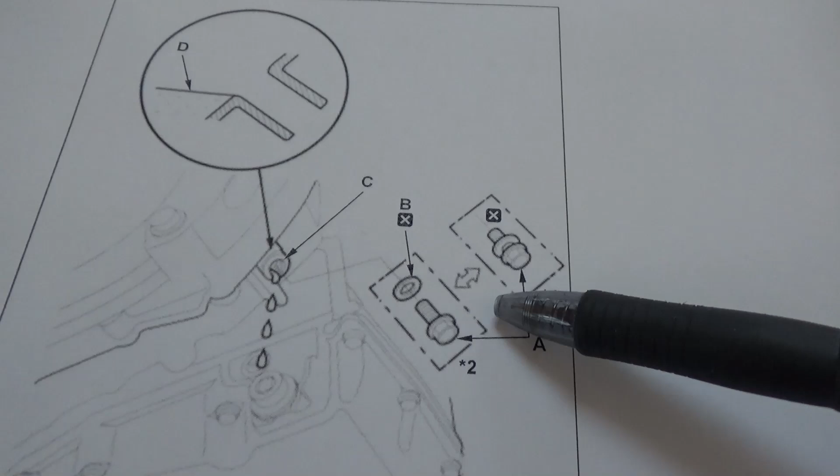The CVT fluid level is checked via a check bolt, so you want to make sure that the vehicle is level when you check it. So you will want it up on 4 jack stands or on a lift or something that keeps the body level so it doesn't affect the accuracy of the transmission fluid check.

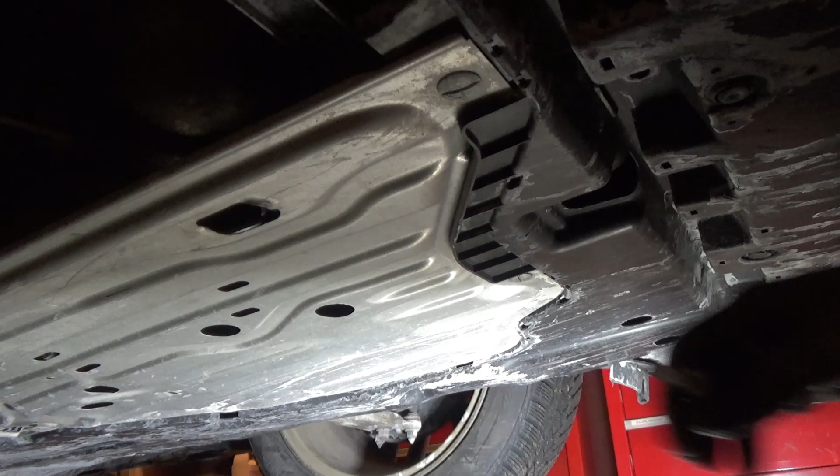And then you do have to take this panel off. There's just some single turn fasteners that have a straight slot in them in the front of it. And then I think there's one a little bit further back here. Yep, right about here.

Okay, and then in the back there's 2 Phillips head screws that have to come out. Definitely helps with these if you coat them with a little bit of oil or WD-40 or something before you put them back in, so you can get them back out again. Otherwise the threads on the top are exposed, so they get pretty stuck in there. And then once you've got all the fasteners out, the whole little metal panel just slides back and comes out.

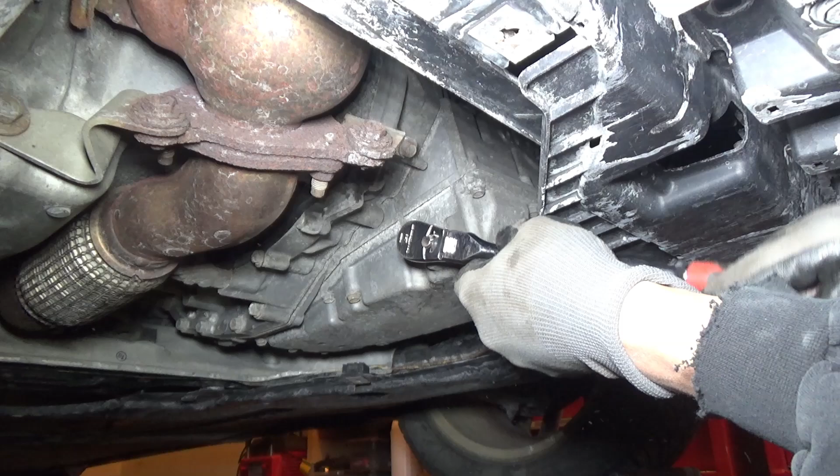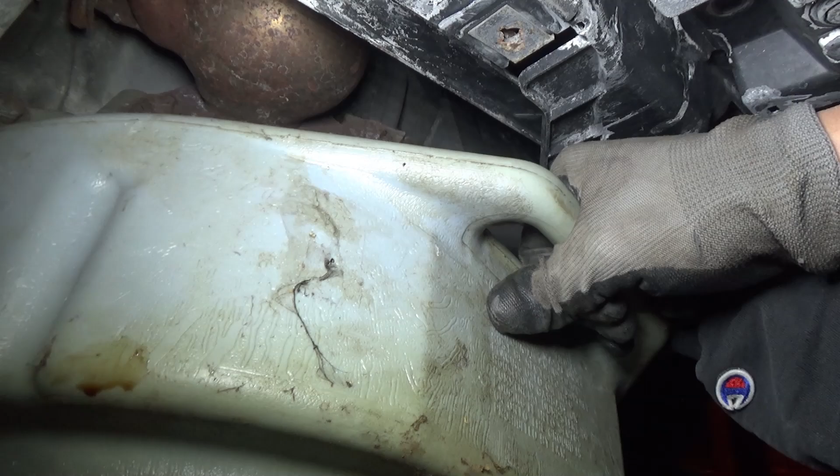And then the drain plug for the transmission's right up here. So I've got a drain pan underneath it, and I'm just going to pop that plug loose, hopefully. Okay. Hopefully it won't douse the camera with the transmission fluid. I'm just going to hold the pan up so it starts.

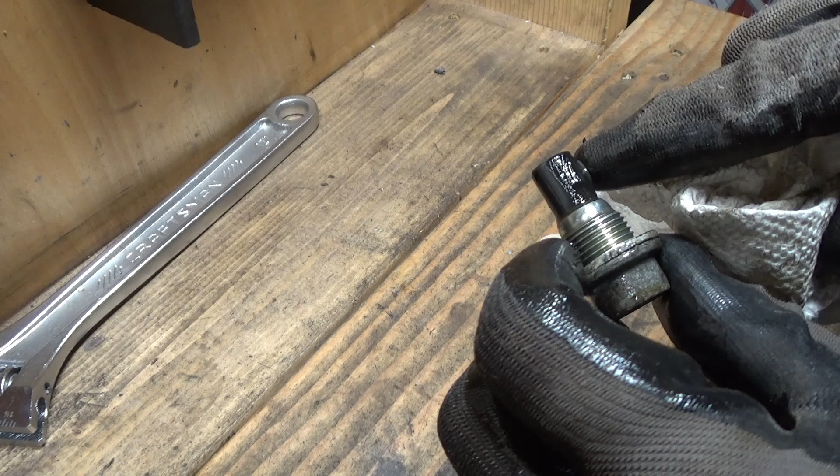And then the drain plug has a magnet on it to collect any fragments, so you're going to want to clean that off. And there's a washer that technically should be replaced. So not too much, a little bit of sludge on the magnet, but nothing too alarming, I guess. We'll put a new washer on there.

Okay, and once it's all drained out, then you can stick the plug back in there. Don't forget the washer again. And the torque on that is 49 Newton meters.

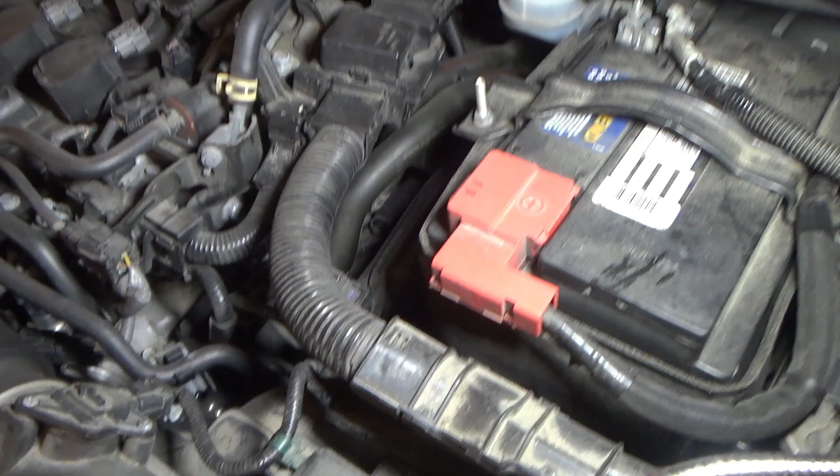Now the transmission fluid filler is up here by the battery, and if you look down in there, you can see it's got that white flange on it, and there's a little right angle rod coming out of it that you can grab onto with some pliers and pull it out of there. Hopefully, it's kind of a pain to get to. Let me see if I can get it out of there.

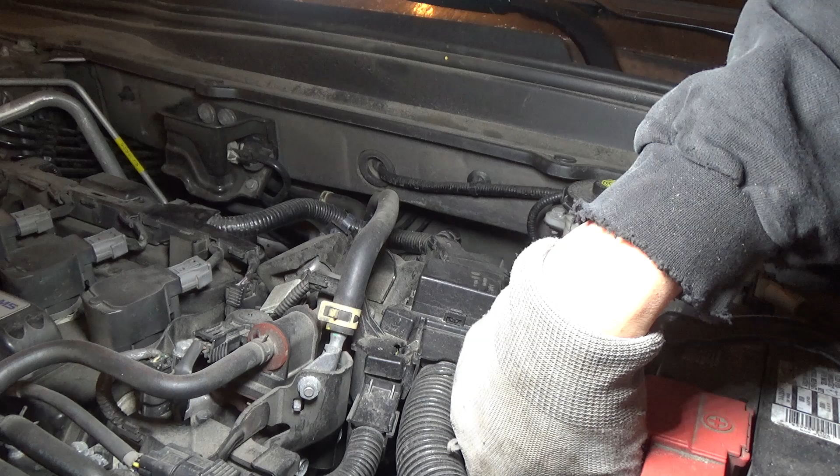So that's what it looks like. And it's got a little note on it. It is HCF2 fluid. And there's that little hook that you can kind of grab onto to pull it out of there. And then you want to have some kind of a long neck funnel to get down in there.

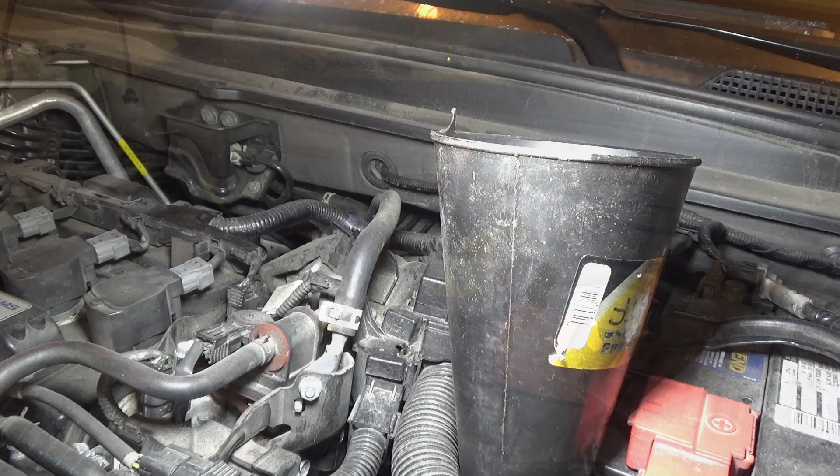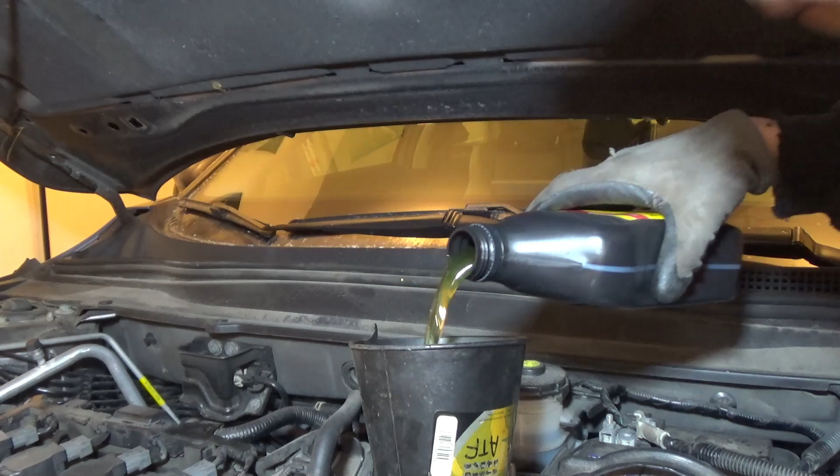And then we'll be filling it with 3.9 quarts approximately of this HCF2. I've got a couple partial quarts, so I'm just going to try to get it close to the 3.9. Okay, that's 3. So now we need 0.9 more approximately. Okay, and then I'm going to put the plug back in there.

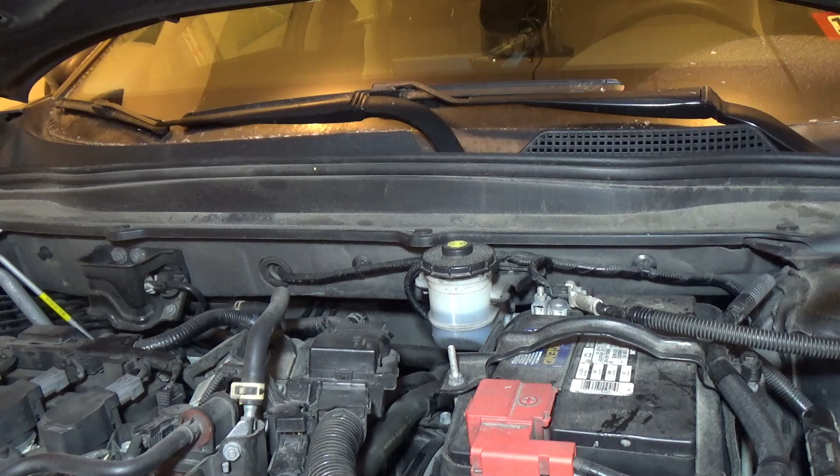Okay, then you want to hop in and start it up. And you want to just let it run in each gear for about 3 seconds, and just with your foot on the brake, obviously, run it through each of the gears and let it sit there for about 3 seconds.

And low. Back to drive. Back to neutral. Reverse. And then back to park. Okay, and then we'll turn it off and go back underneath and check the level.

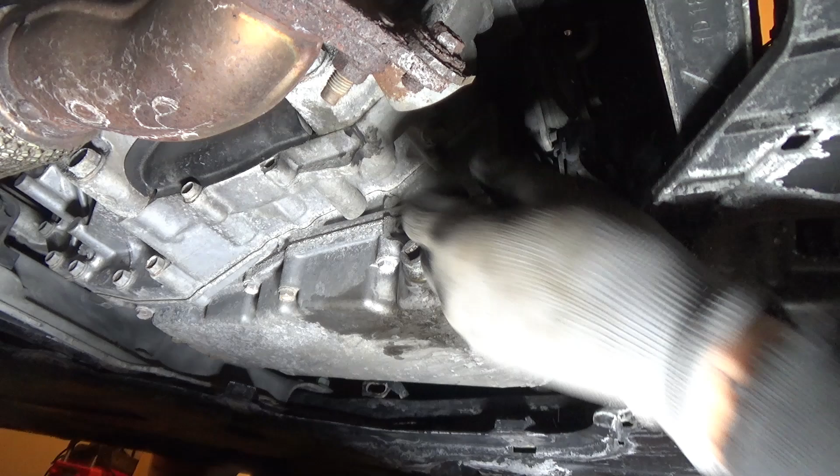Okay, so now right up in front here, there's the check bolt, and we're just going to knock that loose, and then it should have a steady stream dripping out of there if it's filled enough. Okay, and I don't see a steady stream, so I think that means it needs a little bit more, so I'm going to go back up on top and just top it off a little bit.

Added a little bit more than I should have, but I think it's all right. Okay, so there's just the steady drip. So I think that should be good. Just put the check bolt back in place here. Clean up the oil a bit here. Okay, and then the check bolt torque is 20 Newton meters.

And that's all there is to it. Don't forget to put the filler plug back in place, but then you should be all set. I just wanted to make a few final comments.

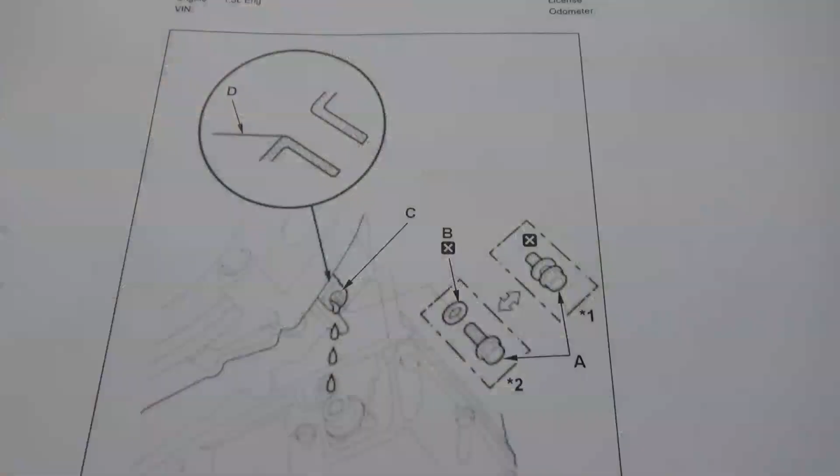One is that you notice that the check bolt spout actually comes down at an angle. So if you get a little bit of spillage out when you remove the check bolt, it doesn't necessarily mean that you're at the full level. It could just be that a little bit of splash over collected in that spout. So you really want to look for that continuous dripping out of the spout that indicates that the transmission fluid is really up to the spout level.

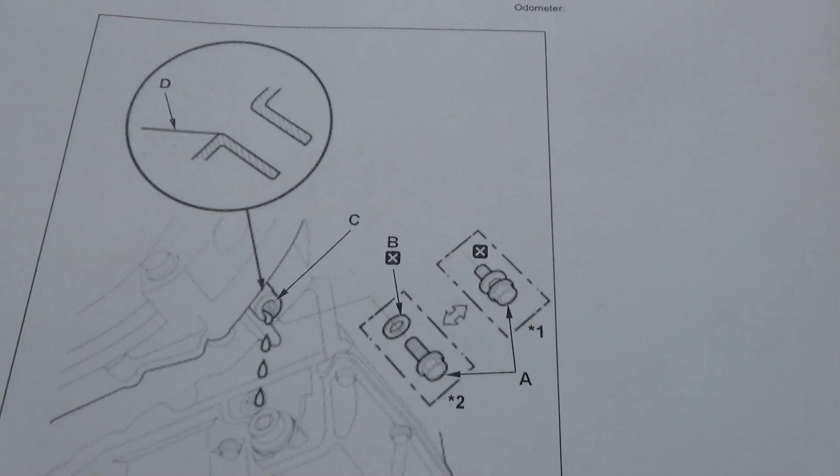The other thing I wanted to note is that Honda actually has a warning that they've seen underfilled transmissions, and you should really keep the check bolt in while you're filling the transmission, but also while you're running it through the gears prior to checking the level.

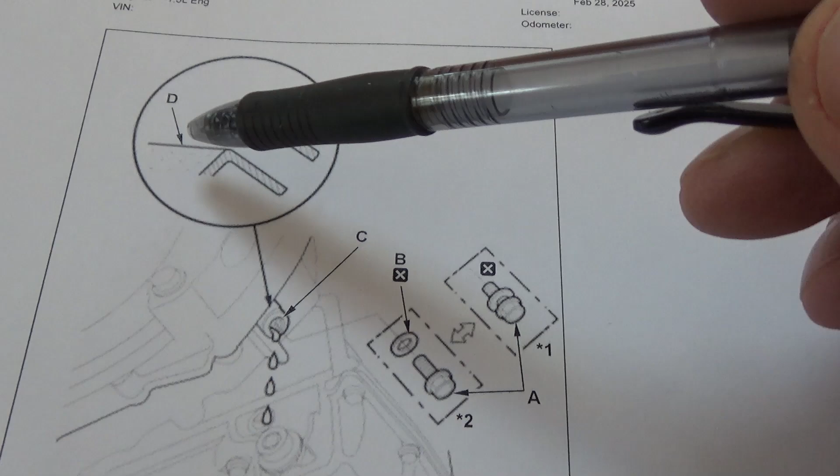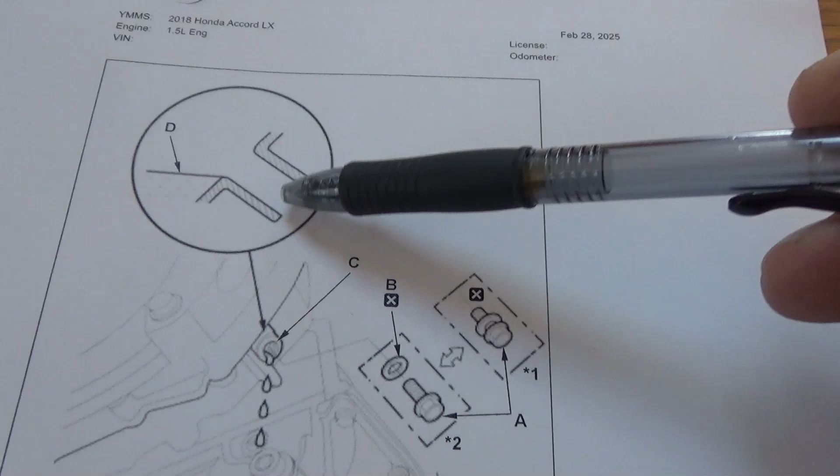And I think the concern is that if you have the check bolt out when you're running it through the gears, then the transmission fluid level might be fluctuating a little bit, and you might see some transmission fluid coming out, but then ultimately the level might sink below the level of the spout here where it starts to come out, and you won't realize that it's underfilled because you saw some of the transmission fluid come out of the spout. So they recommend keeping the check bolt in while filling the transmission, and also while running it through the gears prior to checking the level via the check bolt.